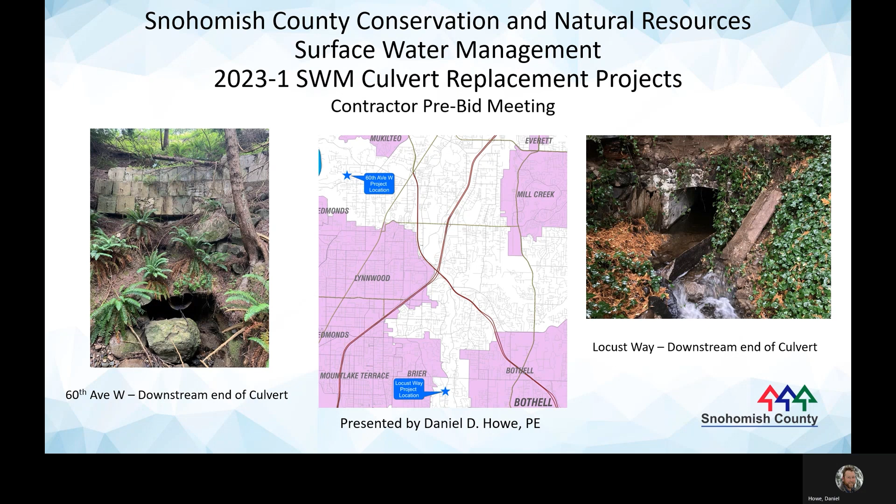Due to the complexity of the two projects included in this bid package, we are holding this pre-bid meeting to inform contractors about the projects and encourage contractors to visit the project sites.

Here is an outline of what we will be going over today: upcoming bidding schedule, availability of the projects for site visits, project background information including location, and we will be reviewing notable project items.

Project sites are available for site visits now. However, the sites themselves are not staked. The bid advertisement will be in early February and have a 3-week minimum bid period. Bid opening will be at the end of February.

Here is an overall look at the expected construction schedule. Project advertisement in February with anticipated notice to proceed in late March. We are expecting this to be a 1-year project. There are limited in-water work windows for both sites.

Locust Way has an in-water work window of August 1st through August 31st. 60th Avenue West has an in-water work window of July 15th through September 15th.

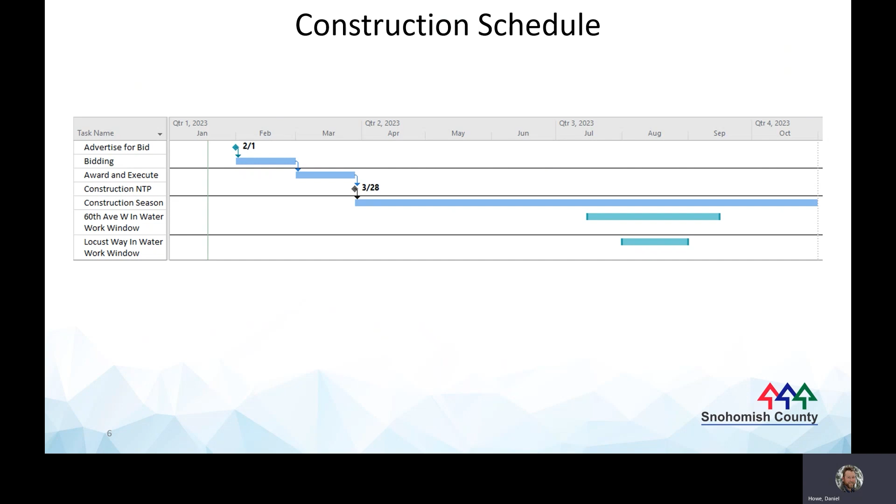We will not be conducting organized site visits. The easements for these projects do not take effect until April, so everyone will need to stay within the road right-of-way.

These projects are in Snohomish County, Washington. The first project site for Groups 1 and 3 is located in unincorporated Snohomish County near the city of Bothell. The second project site for Groups 2 and 4 is located in unincorporated Snohomish County near the city of Edmonds.

Group 1 is the work related to the culvert replacement at the 23325 Locust Way project site. Group 2 is the work related to the culvert replacement at the 14406 60th Avenue West project site.

Groups 3 and 4 are the utility relocation work associated with the culvert replacements at the respective project sites.

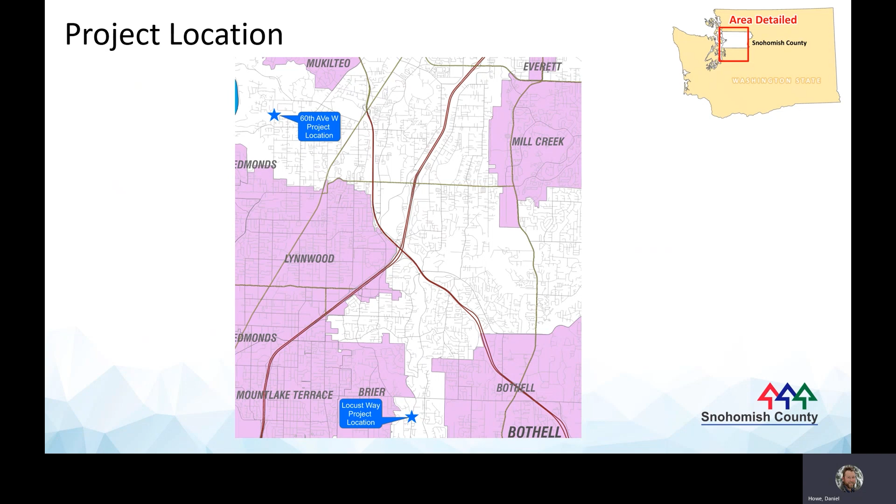Here's a little project background. For Locust Way, the culvert was determined to be failing, causing potholes in the road, and for the overall road prism to start sinking. The culvert is located on Trickle Creek, which is a tributary to Swamp Creek.

This requires the replacement structure to be designed to meet fish passage criteria. On 60th Avenue West, the culvert was inspected and determined to be failing due to corrosion and therefore scheduled for replacement. The stream is a tributary to Norma Creek, which requires the replacement structures to be designed to meet fish passage criteria.

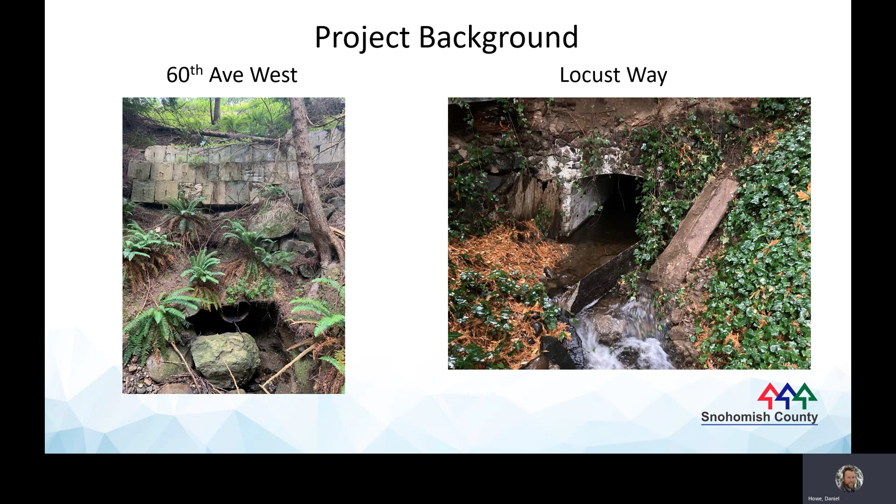Today, we will be providing a brief overview of notable project items shown on the list here.

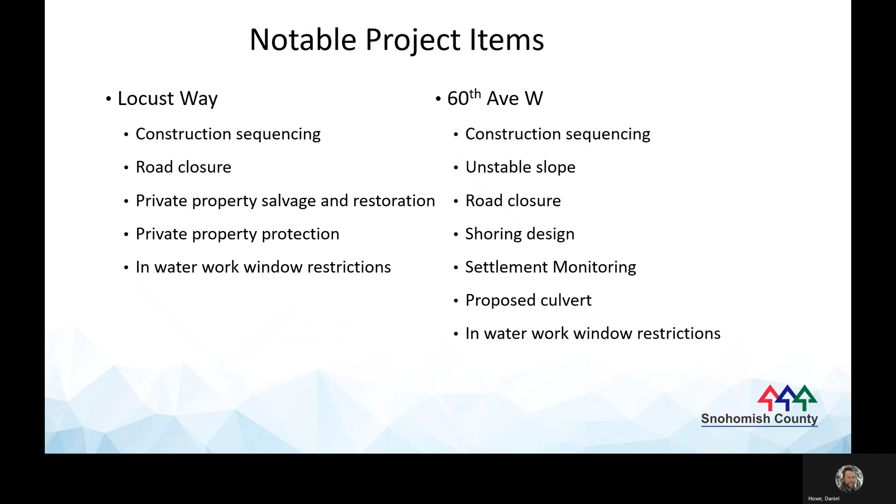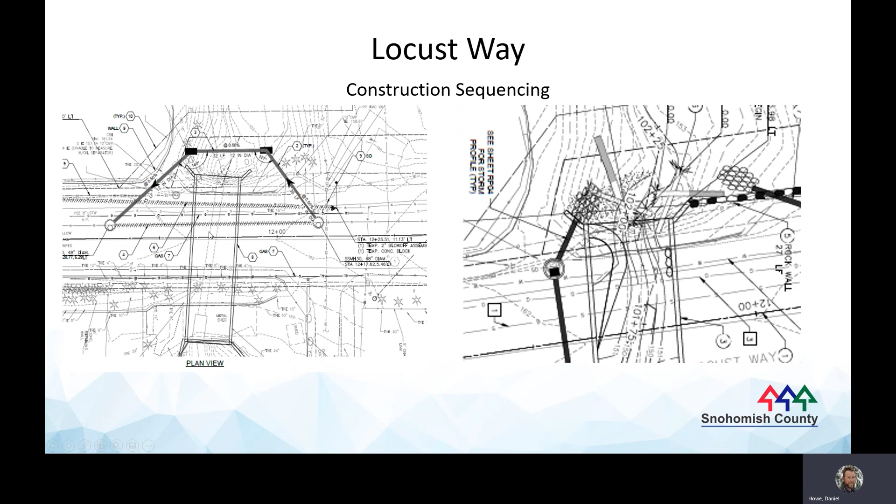The bid package will have 157 working days based per Section 1-08.5 of the special provisions. Substantial completion is based on the entire bid package.

The property owner prefers for the carport to be stored on site during construction and will provide a location for the storage. This will be coordinated with the engineer. All other items will need to be removed from the site and stored by the contractor.

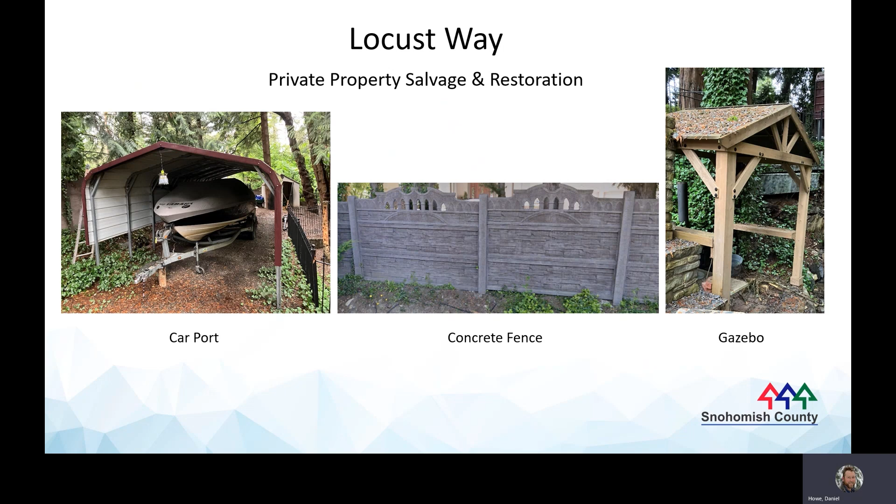Private property protection. There are two items that will need to be protected in place. One is a wood-fired brick oven immediately adjacent to the gazebo. That will be temporarily removed. This brick oven will need to be protected in place and, if damaged, repaired at no expense to the county.

Due to the large excavation and proximity of adjacent dwellings, the contractor will be required to provide settlement monitoring of structures within 200 feet of the limits of excavation. The settlement monitoring requirements are detailed in the special provisions.

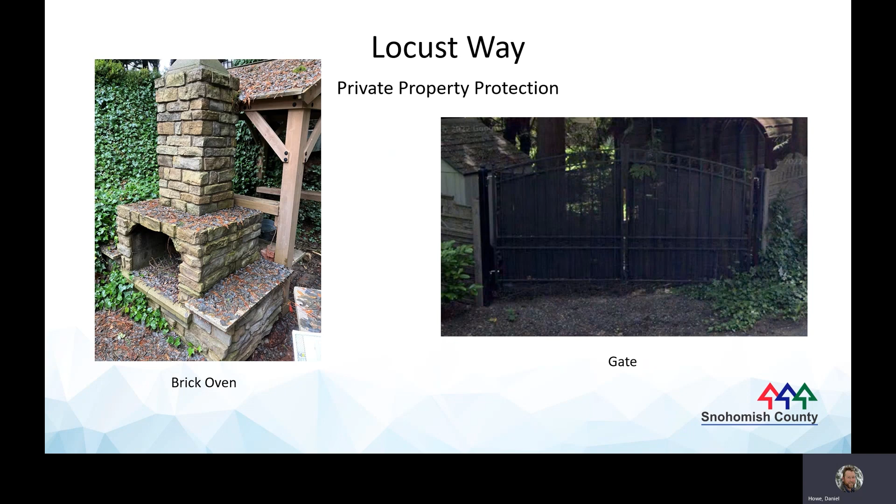As mentioned earlier, the in-water work window for Locust Way is August 1st through August 31st.

So moving on to 60th Avenue West, we need to talk about construction sequencing and an unstable slope.

Due to the deep excavation and narrow work limits, the contractor will need to have a detailed construction sequencing plan, taking into account all of the utility work included in Group 4, the downstream channel alignment work, and installation of the new culvert. The contractor will likely need to complete all downstream channel work prior to the placement of the culvert and any other remaining work.

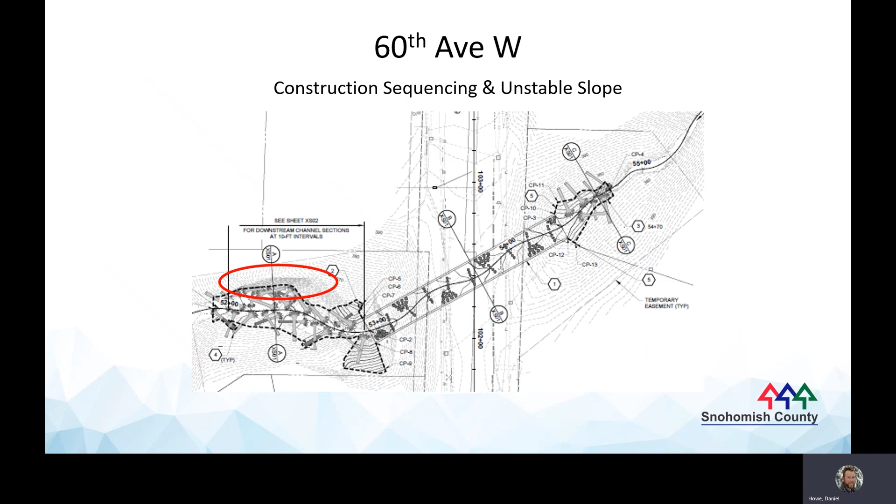All material to be placed beneath this bluff shall be placed by equipment, and the contractor should avoid having construction staff working beneath this bluff.

The bid package will have 157 working days per section 1-08.5 of the special provisions. Substantial completion is based on the entire bid package.

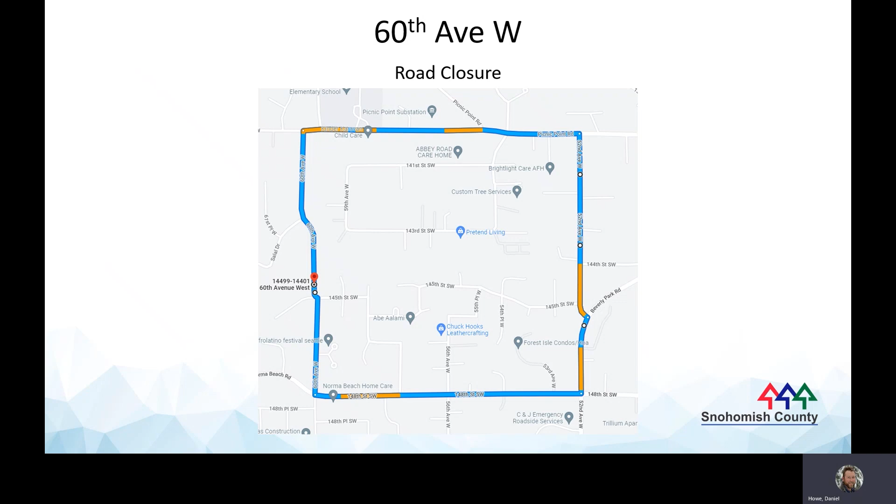Shoring design and settlement monitoring. Due to the deep excavation and close proximity of the adjacent residences, the contractor will be required to keep all excavation within the defined clearing limits. This will necessitate the use of shoring to be designed by the contractor and approved by the county prior to construction.

Due to the large excavation and proximity of adjacent dwellings, the contractor will be required to provide settlement monitoring of structures located within 200 feet of the limits of excavation. The settlement monitoring requirements are detailed in the special provisions.

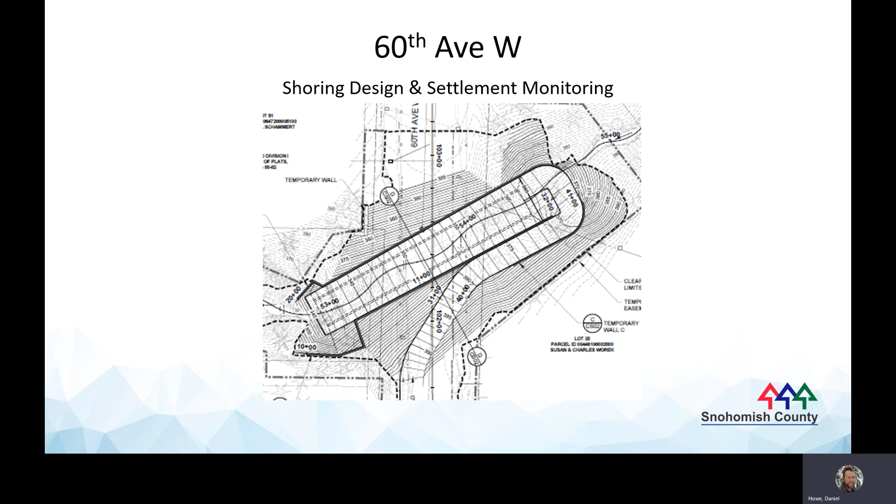Let's talk a little bit about the proposed culvert. The proposed structure is a concrete box culvert that is to be set at a 14.46% slope. This steep slope will require careful design by the precast supplier and may require the use of cutoff walls to help with stability.

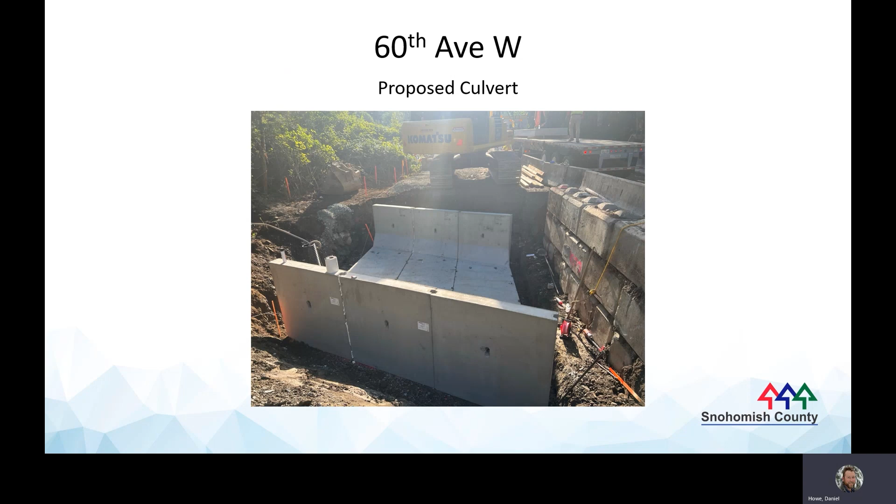Due to the deep excavation and the limited access, the contractor will also need to account for the size of the individual culvert pieces to be cast and their weight in combination with the equipment planned to move them on site. The size of the crane or excavator on site may be limited due to the depth of excavation, and the contractor will need to work with the precast supplier to design a culvert section that will work with the available equipment.

As mentioned earlier, the in-water work window for 60th Avenue West is July 15th through September 15th.